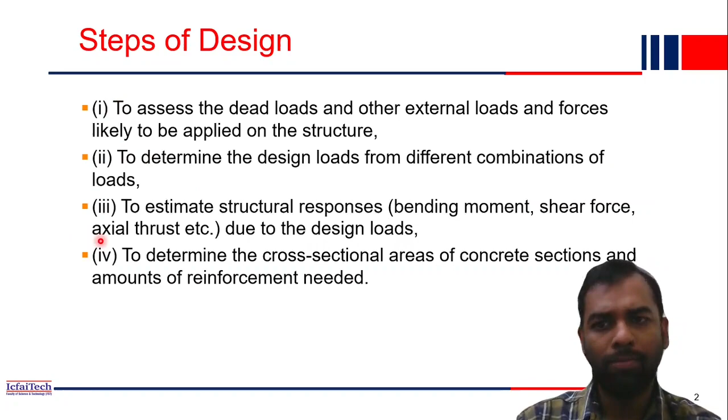You have to follow all the 4 steps irrespective of the methodology. Now let's get started with what are the different design philosophies available for design of structures. These are the 4 methods widely available for design: first, working stress method; load factor method; strength and serviceability method; and limit state method. These are the four design philosophies available for design.

Currently we use the limit state method extensively for our design. This is the latest philosophy developed, and currently all the major structures in India, or abroad, in the world also, follow the limit state method. At the beginning, maybe in the 19th century, 100 years back, the working stress method was developed, and then gradually philosophies came and developed, and currently we follow the limit state method design philosophy.

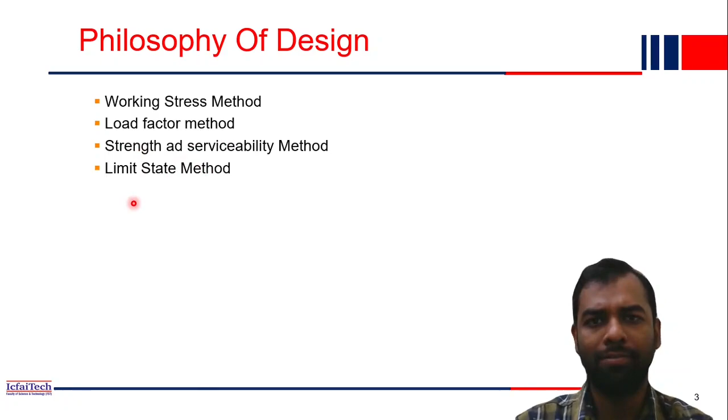Now let's get a basic understanding of the working stress method. The working stress method, as I mentioned, was developed in the 19th century, more than 100 years ago. That's why all the structures which are 70, 80 years old were designed using the working stress method. In the working stress method, you will have one term called modular ratio, which is nothing but the ratio between modulus of elasticity of steel and modulus of elasticity of concrete. This modular ratio is extensively used in the working stress method.

In the working stress method, the structure dimensions will be very high. That's why in olden structures which are 100 years old, you will find the column dimensions and beam dimensions are very wide, because of how we considered the material properties at that time. In the last lecture we discussed the material properties of steel and concrete. So let me draw it here also.

So the stress strain curve: this is the stress axis sigma, and the strain axis epsilon. The stress strain curve of concrete will be something like that. Similarly, the stress strain curve of steel, if you perform the tensile test of steel, with strain epsilon and stress on the axes, will be something like that. You will have a first tilting point, a second tilting point, again load will increase, and then breakage will happen. So this is about steel.

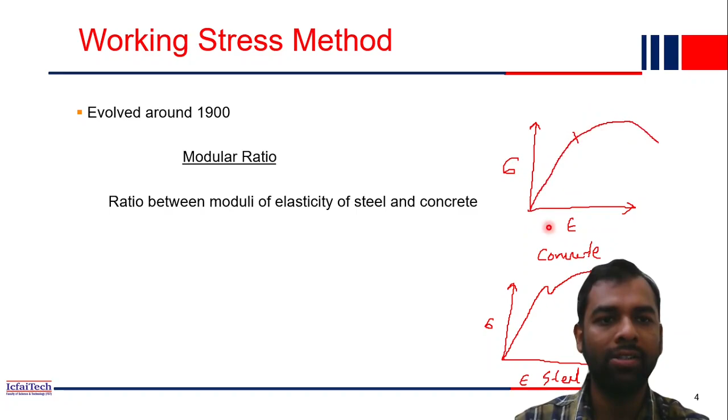So we'll consider the material up to this point, where the straight line is linear. Up to this we'll consider, and we just ignore these portions. So that is our assumption and the limit in the working stress method.

Now, what is the factor of safety? If you recall, we have discussed it in earlier classes also. Factor of safety we consider because in our design steps you saw we use loads. Load also is not constant, it is uncertain, right? We used characteristic strength and characteristic load, if you recall from the last classes.

So many uncertainties are there in a structure: material properties are uncertain, loads are uncertain. All these parameters are actually uncertain. That's why we have to use some factor of safety to be on the safer side. That's why we always use some safety factor. Safety factor is what we just multiply with this value.

For example, a load of maybe 10 Newton is coming on a beam. But while designing, we'll not consider 10. To be on the safer side, we'll multiply 10 with 5, so it will be 50 Newton. So we analyze the structure considering that the load will be 50. But in reality, the load may be 10.

But we multiply this with 5. Maybe this is an example. This we call the factor of safety. We just multiplied with some constant to be on the safer side. That's why we call it factor of safety. So that is for the load. For load, basically we are increasing the value, whereas for a material we are decreasing the value.

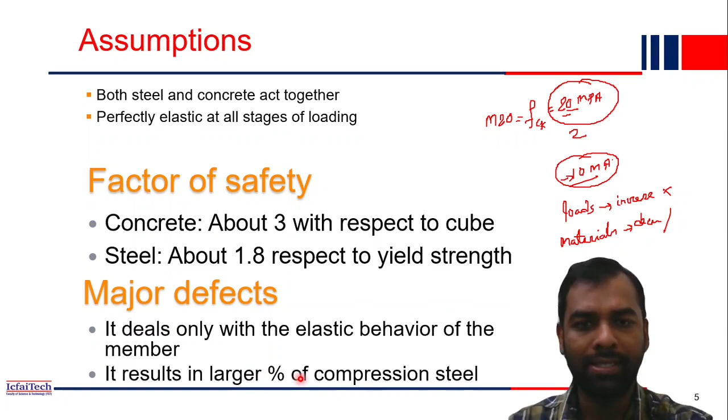Another is it results in larger compression steel. Okay, so we'll see what is compression steel in the subsequent lectures. But because the partial safety factors it uses are very high, that's why we need large compression steels. So that's about the working stress method.

Now let's discuss the load factor method, or we call it the ultimate load method. It was introduced in 1956. If you see, the last method discussed, the working stress method, was developed in the 1900s, whereas this method was developed 50 years later. So the strength of an RC section at working load is estimated from the ultimate strength of the section.

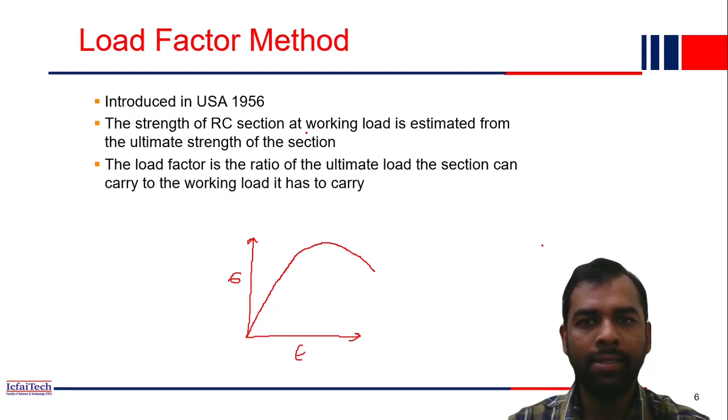So in the working stress method, what did we consider? We considered up to the linear portion of the curve. So let me draw it quickly. So this is your stress strain behavior of concrete. It will be a linear portion, and then something like that, and breakage will happen here. So this is strain and this is stress. In the working stress method, we are considering up to the linear portion. So whatever value we get here, that is what we consider in the working stress method.

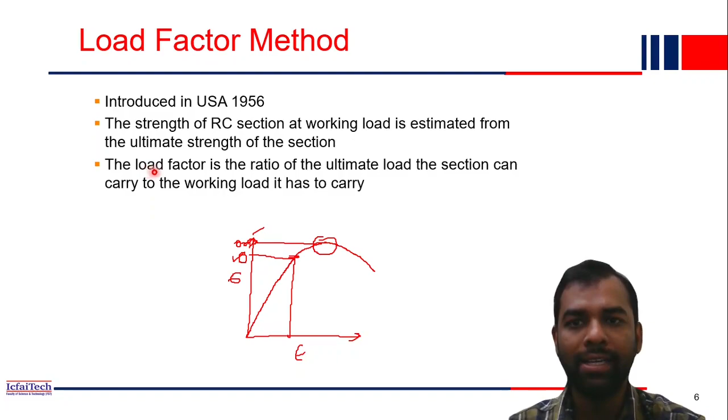But in the ultimate load method, we'll use the ultimate strength. So here up to this portion we'll consider. Because of this method, basically we are using more of the ultimate strength of a material. So because of that, our structure won't be thick now. It will be a thin structure because we have increased the use of material properties. We are using the ultimate load. The load factor here is the ratio between the ultimate load the section can carry to the working load it has to carry. So in the working stress method we use the modular ratio, but here we are using the load factor.

Now the next question is the reason why we shift from the working stress method to ultimate strength design. Because a reinforced concrete section behaves inelastically at higher loads. Right? In the working stress method, we are just ignoring the inelastic behavior. Whereas in reality, concrete has its highest strength in the inelastic region. So we should use the inelastic part also. So that's one reason. Next, ultimate strength design allows more rational selection of the load factor. And the stress strain curve is non-linear and time dependent. So all these parameters are used in ultimate strength design or load factor design.

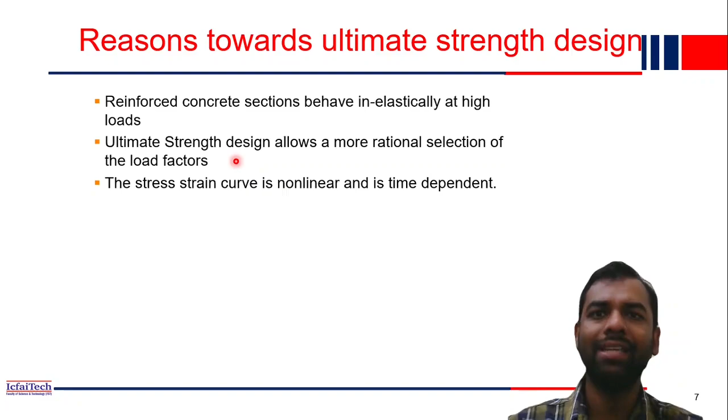So in the working stress method, what you saw is we use only the linear portion of the material. That's why our beam and column dimensions are very high. Whereas in the ultimate strength method, we use the ultimate strength of a material, whether concrete or steel, and then we design. So our beams and columns won't be that thick. It will be rational. So these are the two extremes.

Now our third philosophy, design for strength and serviceability. So what is design for strength and serviceability? In the second philosophy, the ultimate load case, what we saw is we are going up to the ultimate strength, right? Where the inelastic behavior comes. We went up to that portion. So when we go up to that portion, what will happen? We are going into the inelastic region of a material. So you will find there will be cracks in a building.

Although our structure will be safe because the ultimate load has not been reached, once the inelastic behavior starts, you will find so many cracks on the structure. Again, this is also not desirable. If you are sitting in a structure and you find a crack in the building, you will feel panic, right? Although your structure may be safe and won't collapse immediately, you will panic: oh my god, the crack width is more, or the slab deflection is too high.

So these are the things we also have to consider. Not only should our structure be safe, but it should be serviceable also. So this is our third philosophy, design for strength and serviceability. Both we have to consider. We not only have to consider the strength, the ultimate strength we considered in the last philosophy. So we have to consider both strength as well as the serviceability part.

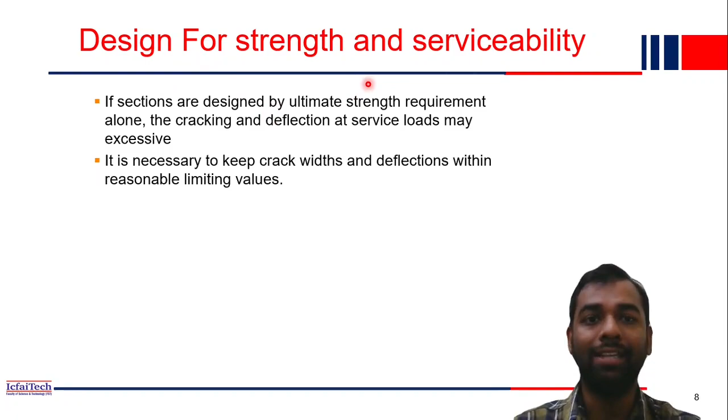So if a section is designed by the ultimate strength requirement alone, the cracks and the deflection at the service load may be excessive. So it is necessary to keep crack width and deflection within reasonable limiting values. That is why design for strength and serviceability is required. So this brings us to our current method, that is the limit state method. Currently we use the limit state method extensively in all engineering structures, in India and abroad also. Major structures are currently done in the limit state method.

So let me just recall whatever we studied till now. The first method we discussed is the working stress method. In the working stress method, you saw that we use the linear part of the material's stress property. Because of that, we use larger safety factors also. That's why our structure is over safe. Structure dimensions of beams and columns are very huge, and the structure is very safe. Okay. But the problem is the economic part. If your beam and column thickness is increasing, ultimately your structure will be more expensive to construct.

So in India or abroad, we are just overestimating the entire part. Because of that, our structure won't be economical. So just to overcome that, in the second method we used the ultimate load method. Means we are using the extreme part of the stress strain curve. So in that case, the structure will be subjected to cracks and all. Once we see cracking, we have to look into the serviceability part also. Now limit state will combine both. It will check stability as well as serviceability. So that's how the limit state method is presented, and nowadays all Indian IS codes we follow also follow the limit state method.

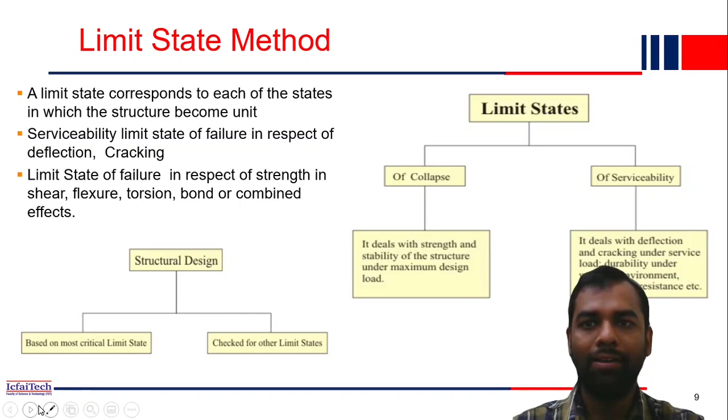So just remember that in limit state we are basically limiting everything. Cracks will be there in the structure, deflection also will be there, but it will be under the limit. That's why the name limit comes, because we keep everything within a limit. In this course, we'll extensively use the limit state method for the design of concrete structures. So this completes our philosophy part. As I mentioned, from next class onwards we'll be starting beam design, where we also extensively use the limit state method, and our Indian standard also extensively discusses the limit state. Thank you.